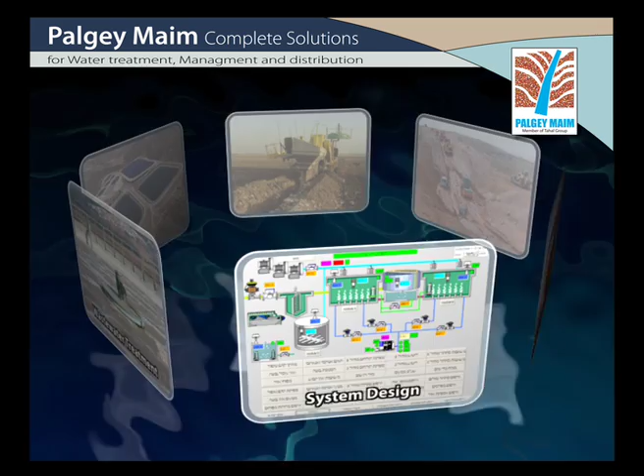Palgey Maim Limited was founded in 1973. Since then, the company has been involved in flowing infrastructures covering a wide range of aspects: reclaiming effluents for irrigation, water supply systems, removal and treatment of wastewater, urban and agricultural drainage, and storing runoff water and wastewater in reservoirs. In all these fields, Palgey Maim manages the initiation of system construction.

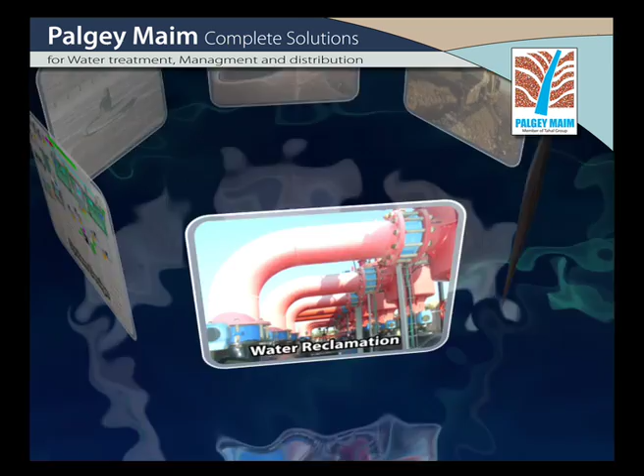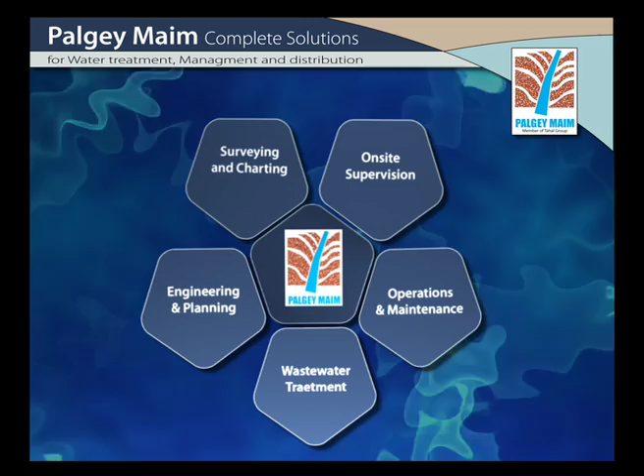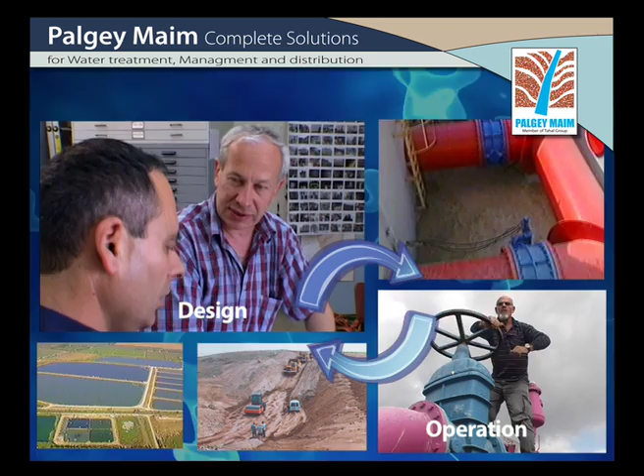This includes the operation and maintenance of water and sewage systems, including wastewater treatment plants, engineering planning, on-site supervision, geodetic measurements, surveying, project management, operations, and maintenance. The large number of diverse fields in which Palgey Maim works facilitates a steady stream of information among all its employees, along with mutual enrichment based on accumulated experience. The company has ISO 9001 certification for all the areas in which it works.

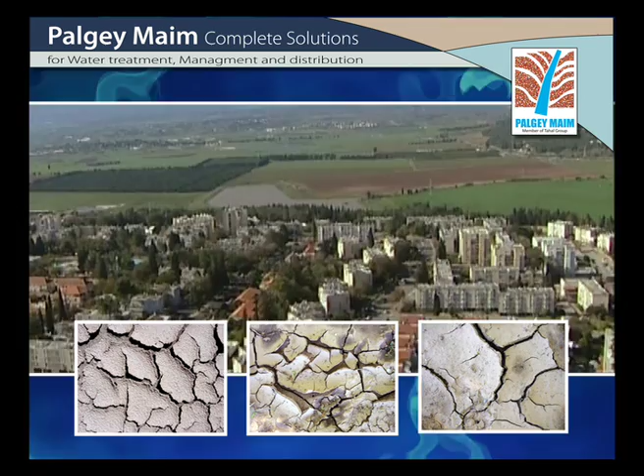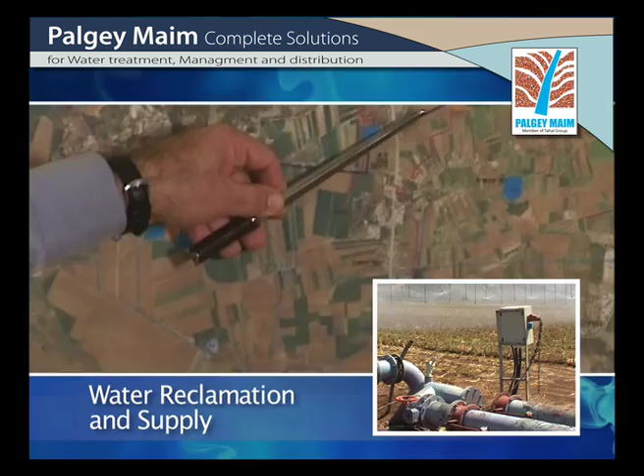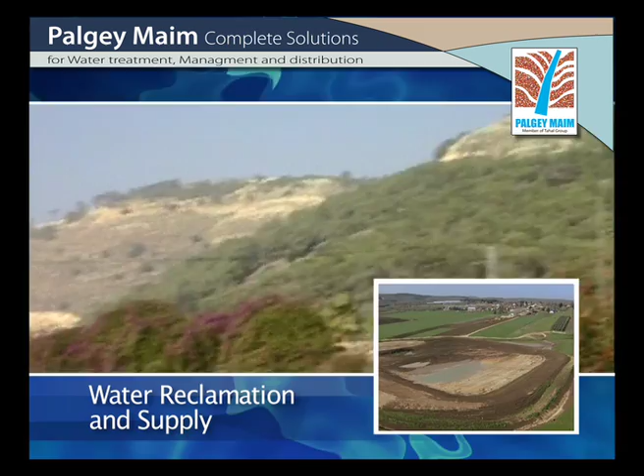The shortage of fresh drinking water and the need to find creative solutions to the treatment of municipal and agricultural wastewater led to the emergence of unique solutions integrating different technologies. There is also a need to improve wastewater quality and reclaim it for irrigation in separate systems while maintaining the required quality. To solve the problem of pollution and take full advantage of purified effluents as a resource, Palgey Maim developed an alternative to exploit agricultural land and available reservoirs to create a wastewater treatment system different from the one proposed for crowded urban areas.

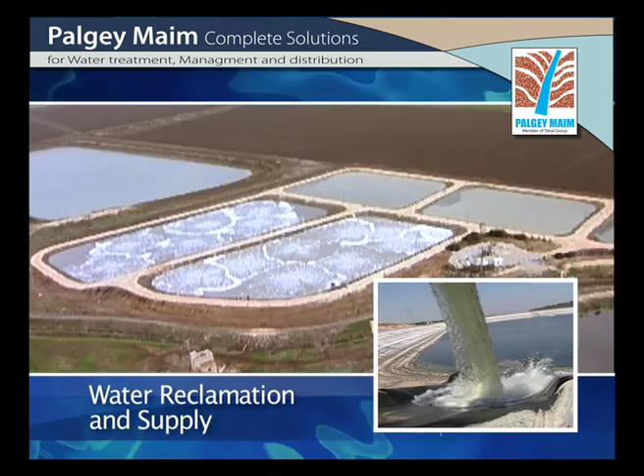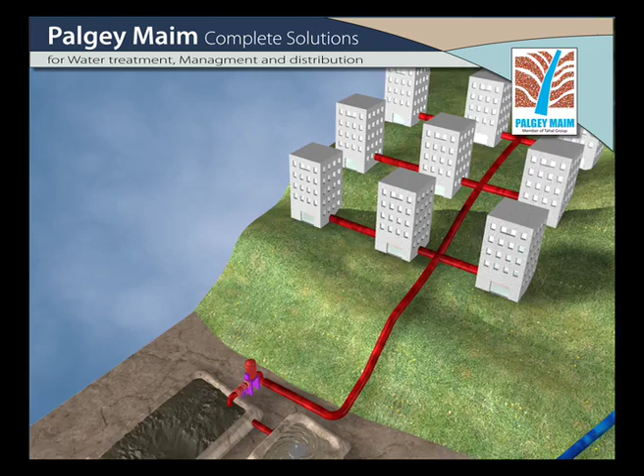Palgey Maim's holistic approach to this problem led to practicable research investigating alternatives for wastewater treatment. The company worked to obtain all statutory permits, brought together all the wastewater suppliers and potential consumers for the effluents, and constructed piping systems and pumping stations to collect the wastewater, as well as wastewater treatment plants, a system for discharging effluents, storage facilities, and supply of effluents. In this way, the Valley Cities project for the purification and disposal of wastewater was established.

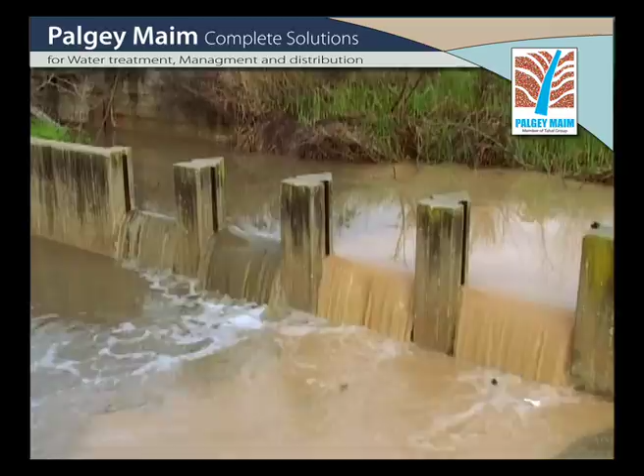Previously, wastewater from the cities, towns, and villages around the Jezreel Valley was allowed to flow by gravitation down into the valley, causing serious pollution and considerable nuisance in many instances. The project called for laying a pipeline covering 82 kilometers.

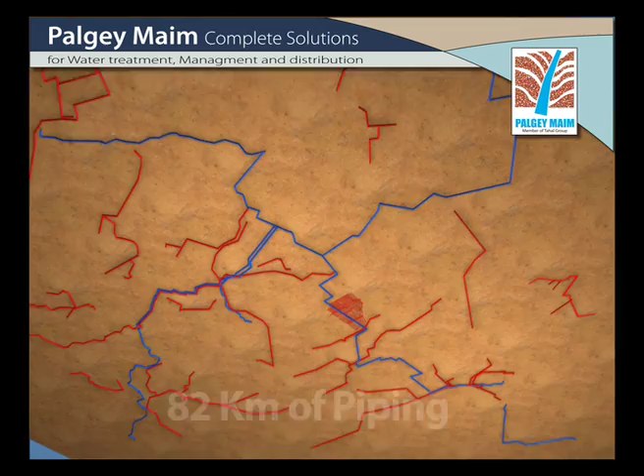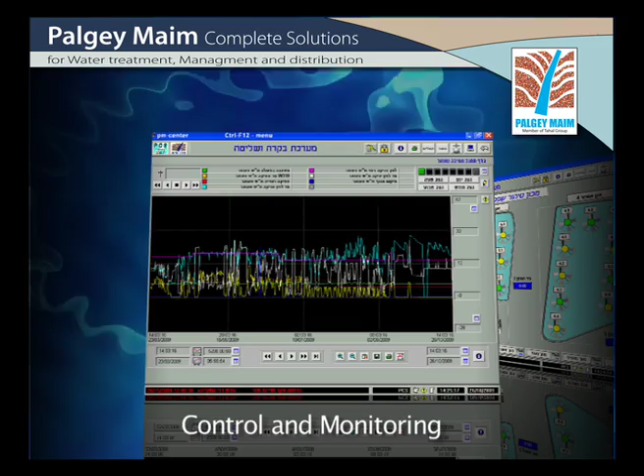It also involved the construction and modification of 48 existing reservoirs with a capacity of 10 million cubic meters. A system of remote control and monitoring was constructed to integrate wireless, cellular, and internet-based communication technologies, facilitating the system's operation and supply of water with service of the highest standards.

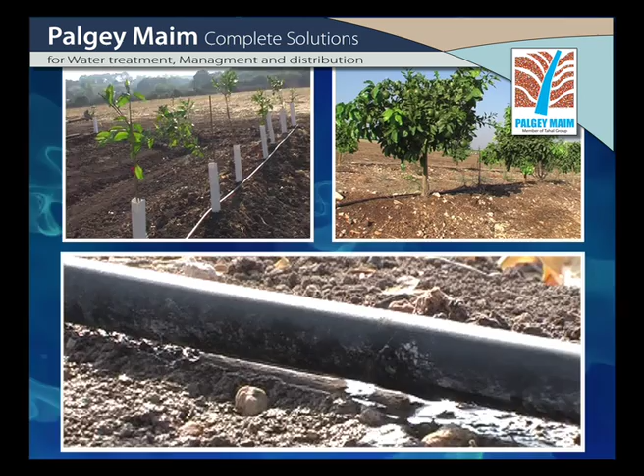When it comes to filtration, Palgey Maim has acquired over many years knowledge based on a combination of field experience together with research on adjusting filtration systems to meet the needs of irrigation technologies. The Water Reclamation Project supplies water to agricultural and industrial consumers, and for more than 10 years now it is managed and operated by a team from Palgey Maim.

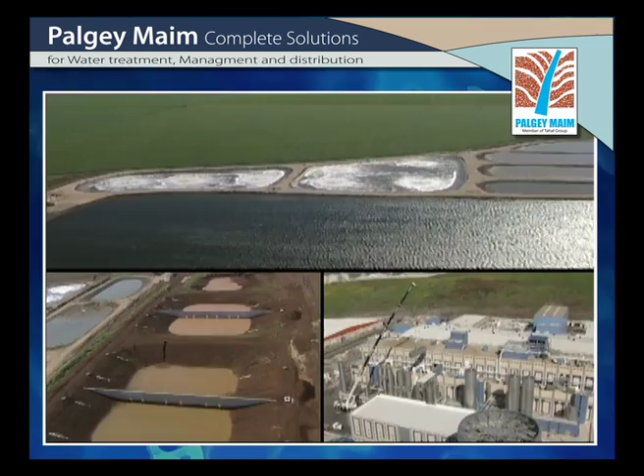The system takes into account the water quality demanded by various consumers, while applying a unique operating plan to fill the reservoirs that enables the required qualities to be attained with optimal energy consumption.

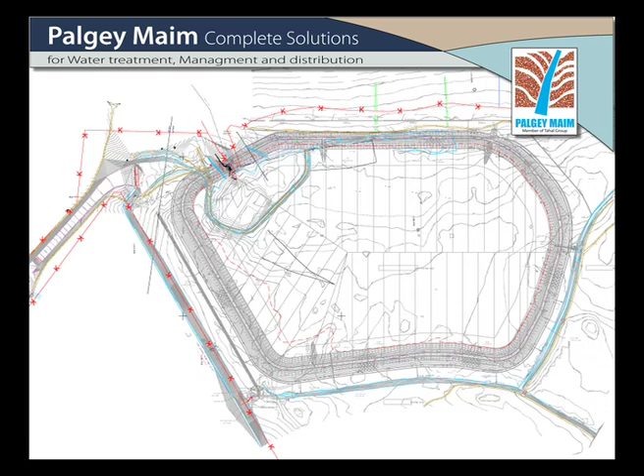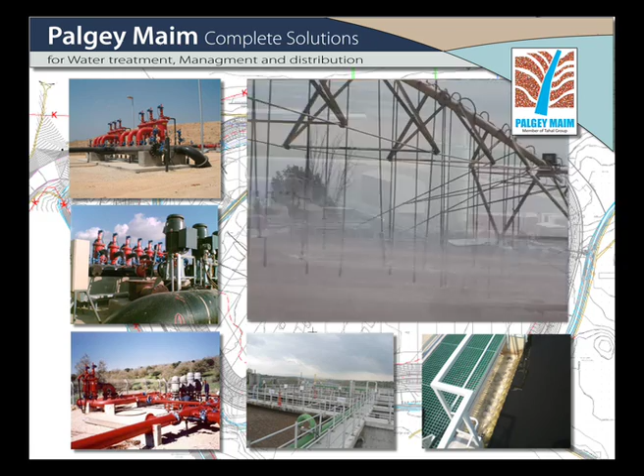Palgey Maim is experienced in the planning and construction of water systems for irrigation covering an area of tens of thousands of hectares. These systems include pumping systems, chlorination apparatus for gas or liquid use, filtration systems, fertilizing systems, control and monitoring systems, main pipelines, and irrigation technologies for drip irrigation, irrigation machines, sprinklers, and more.

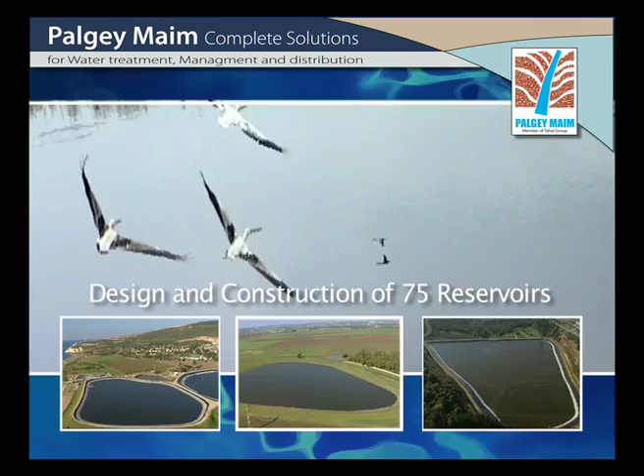Over the years, the company has planned and constructed 75 reservoirs with a total capacity of 60 million cubic meters. This experience also includes earthen reservoirs and the use of sealing technologies with plastic sheeting. The company has considerable experience adapting hydraulic installations to suit reservoir structures and applying accumulated knowledge in the field of subterranean drainage.

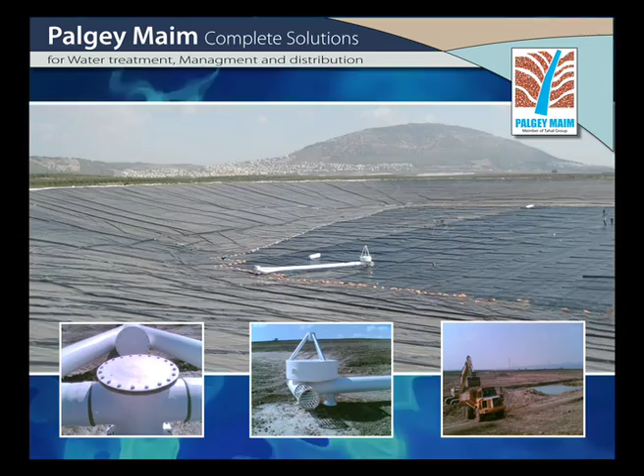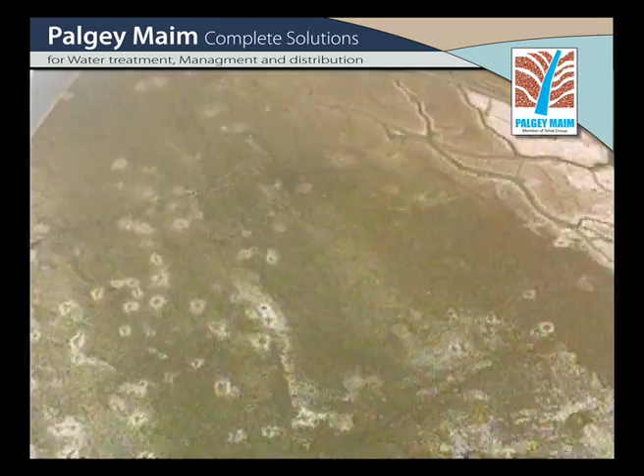As salinization of agricultural land in the Jezreel Valley increased to the point where soil structure was ruined and lands abandoned, Palgey Maim launched a comprehensive systematic treatment plan to solve the problem. The following actions were taken: preliminary research was directed to identify the problems and formulate solutions.

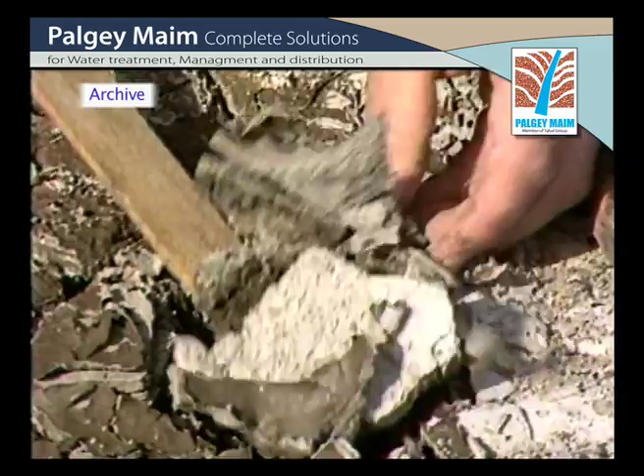Development and implementation of an integrated drainage model, including gravel wells and deep drainage, followed by general and detailed planning of the devised solutions. Management of the project's budget was carried out in cooperation with the Jewish National Fund, Ministry of Agriculture, water commissioners, local regional councils, farms, and similar groups, along with on-site supervision of the work and measurements.

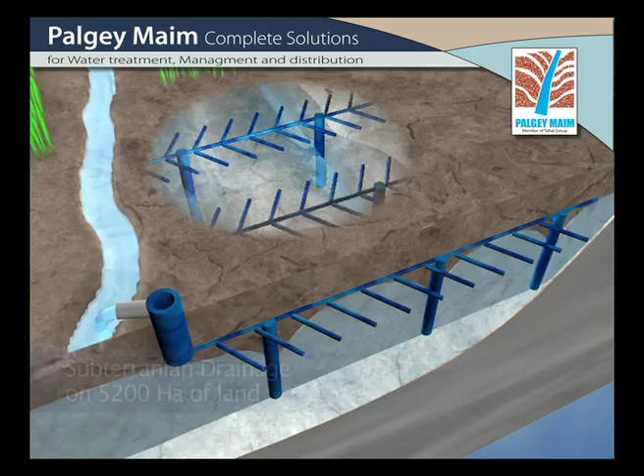As part of the project, subterranean drainage was carried out on approximately 5,200 hectares of land. With the aim of lowering the drainage base in the valley, the main riverbeds of the Kishon, Adashim, and Mizra rivers were rearranged and deepened along 13 kilometers. The lake at Kfar Baruch was redesigned to serve as a side reservoir with gravitational inflow while maintaining the embankment to restrain flooding effects.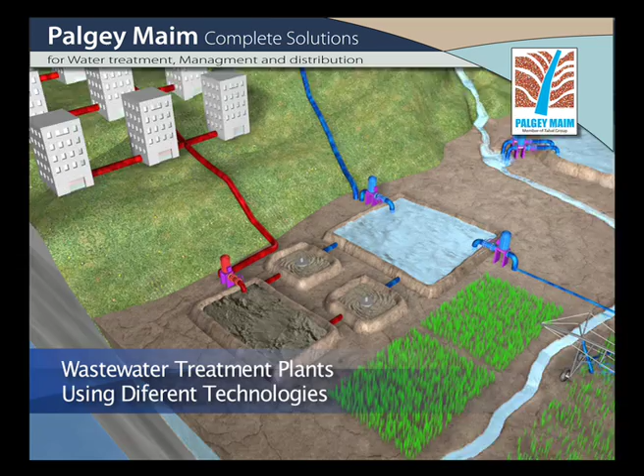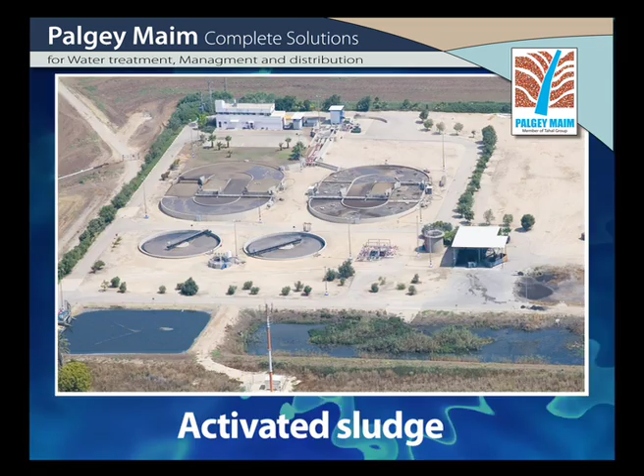Palgey Maim specializes in the planning and operation of wastewater treatment plants, using many different technologies and exploiting knowledge obtained over 15 years of experience. Among the different technologies employed are activated sludge, MBR, SBR, membrane installations, and extensive plants.

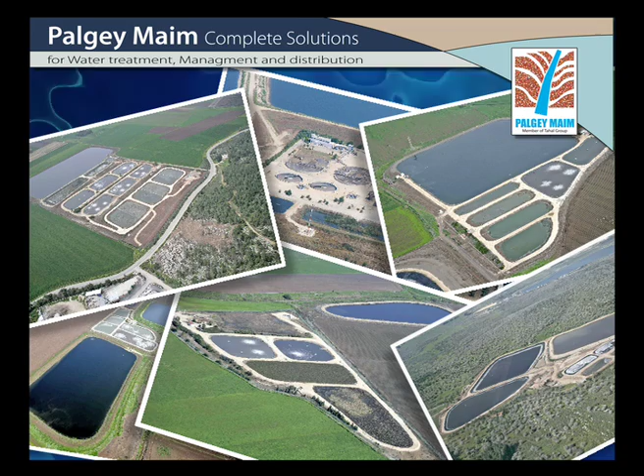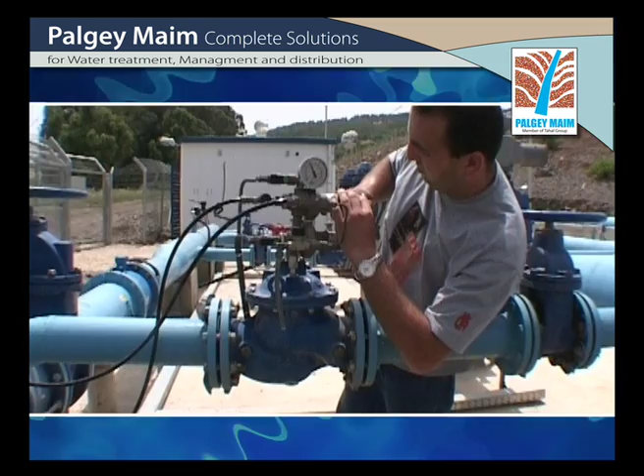Up until now, the company has initiated and managed the construction of 20 wastewater treatment plants and currently operates 14 installations using various technologies, in addition to 200 pumping stations. The plant's operation includes process engineering and technicians' work at the plant. Palgey Maim has 2 specialized laboratories for carrying out chemical, biological, and microbiological tests of the wastewater.

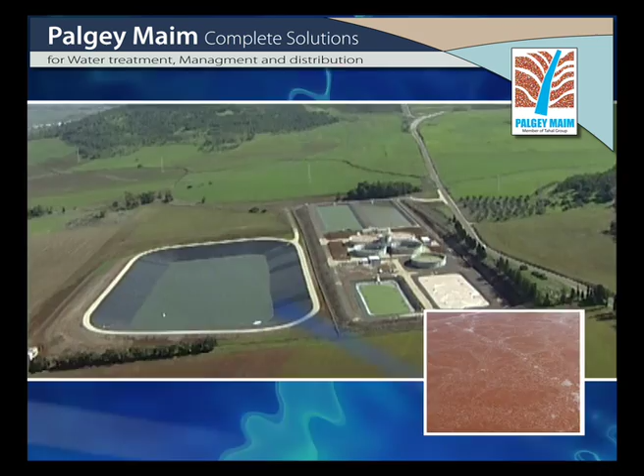Palgey Maim has gained unique experience operating a plant for treating wastewater originating from the food industry at Nuba. The plant, operated with SBR technology, has a daily capacity of 4,000 cubic meters and a load of 3,000 milligrams per liter COD. After treatment, the water is supplied for use in agricultural irrigation.

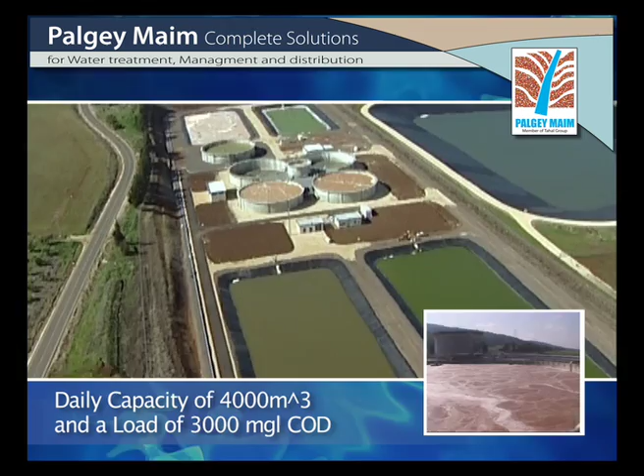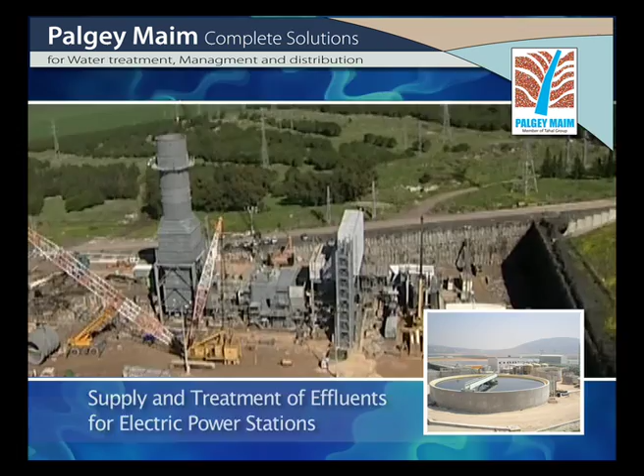Palgey Maim supplies and operates a system for the supply of effluents to power stations, Alon Tabor and Gezer, run by the Israel Electric Corporation. At these power stations, a special technology is used to upgrade and soften the effluents in volumes of up to 1,000 cubic meters per hour.

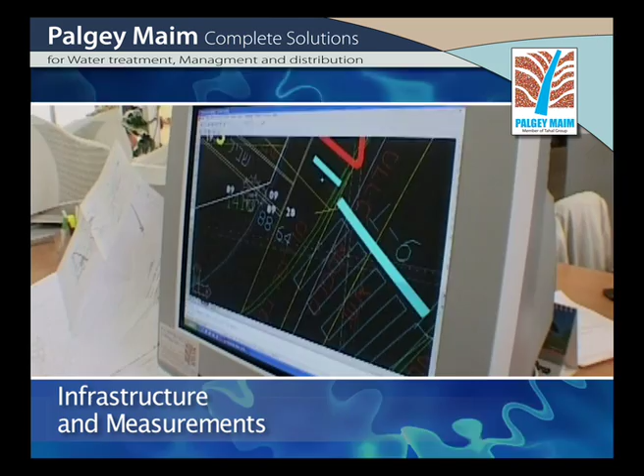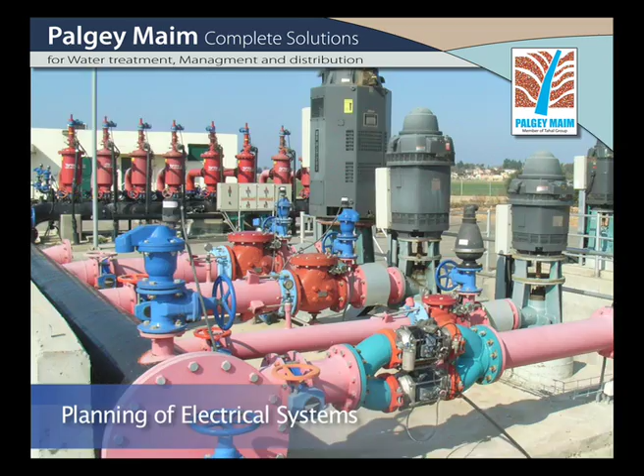One of Palgey Maim's sections engages in measurements and planning of roads while using GIS systems led by a qualified surveyor. In the field of electricity, the company provides services for the planning and supervision of electrical systems and specializes in water installations, wastewater plants, and main infrastructures.

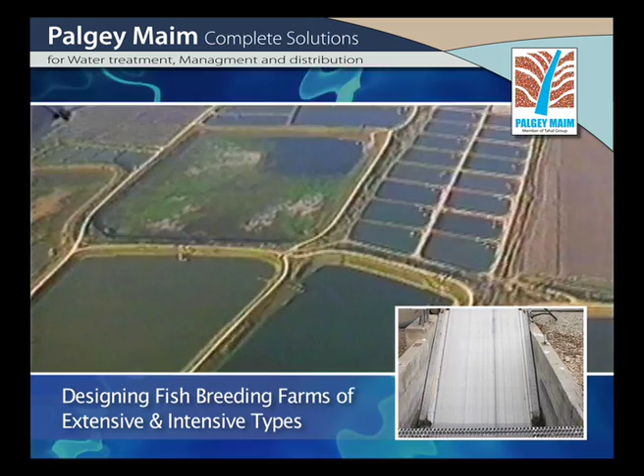The company has gained considerable experience in the planning and construction of fish breeding ponds using both extensive and intensive technologies, including reservoirs, storage ponds, fish harvesting methods, feeding systems, and similar features. Palgey Maim has also designed systems for the collection and separation of cow manure, treatment of wastewater from milking parlors, walkways, manure drying systems, and additional elements.

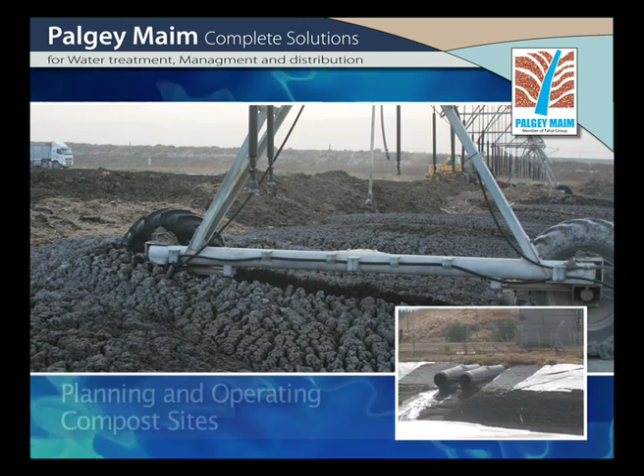The planning also includes compost sites, such as the Amakim compost site for the treatment of 150,000 cubic meters of dung per year, and the Sde Eliyahu compost site.